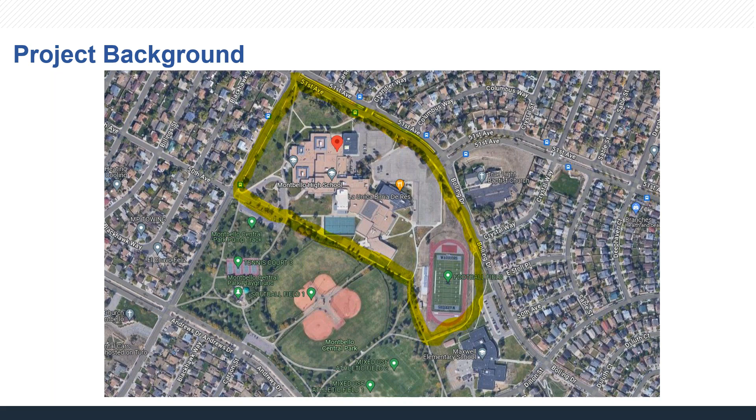So how did we arrive at using structural precast concrete? On the right is an image of what our schematic design process resulted in. To give you a sense, since it's been almost 4 years working on this project, the design team made up of Eidos and EUA was hired in spring of 2021. The general contractor was brought on board as a CMGC shortly thereafter in summer 2021.

Since summer is not the ideal time for public input and community engagement for schools, because people are on vacation and school is out, we spent that summer really digging into this process, assessing the building. Both DPS and the community came into this process saying maybe we're going to build a whole new building, maybe we're going to do a heavy renovation of the existing building. Let's go through this process and find out what we want to do. And of course, where we landed was somewhere in between.

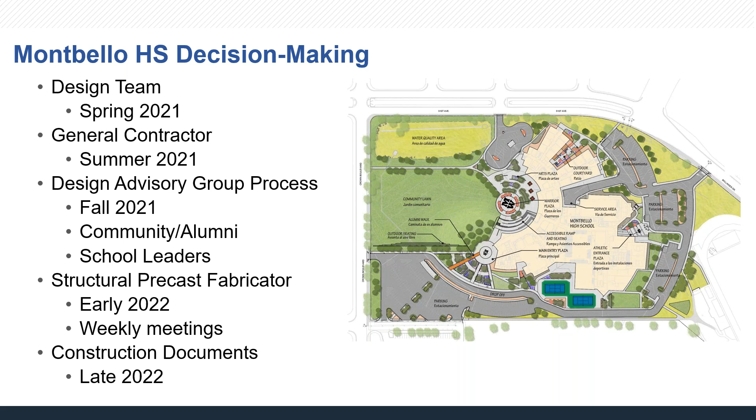We had that community engagement process in fall of 2021, with very active participants, particularly from the alumni group. Shortly after this, once we determined how much of the building was going to be constructed new versus retained, the structural precast fabricator was brought on board in early 2022. We met with them weekly, as Andrea will talk to you more about. Our deadline for construction documents was late 2022, and happy to report the building has just received its TCO, and students will be moving in August.

This is an image of one of those first bubble diagrams we came up with for solving the problem of how to build a new building on an existing site while making sure all students could still attend school on that same site for the 2 years during construction, and also how to incorporate the elements of the building that wanted to be retained.

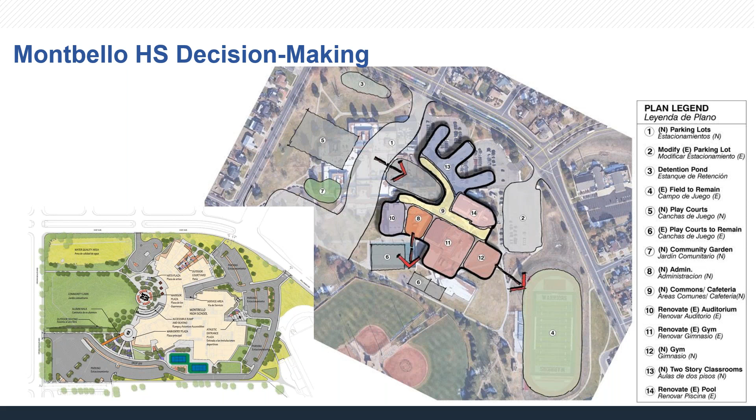Here you see an image of our schematic design compared to the initial bubble diagram. What I want to talk about is answering the question of where were the students during construction, and what did we need to keep to incorporate into the new building. The elements shown at the top of the screen in light green and yellow are where we literally cut the building almost in half, and for 2 years students went to school in that much reduced size high school.

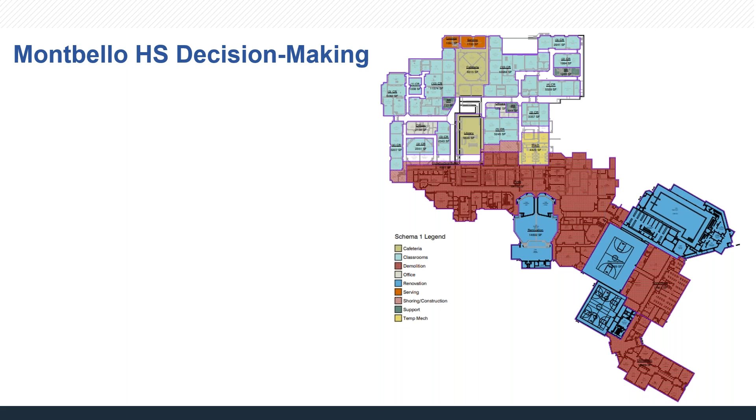It required a lot of renovation, temporary utilities, and a lot of structural work — that's the first time I ever had to cut a building in half. The elements shown in blue at the bottom of the screen are the auditorium, the gymnasium, and the pool — those are the elements the community wanted to keep from the previous building. Everything shown in red is what was to be demolished in this first phase.

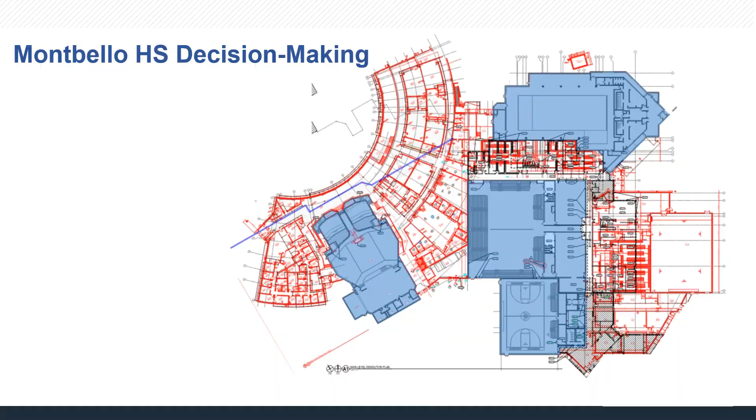This is an image looking again at the blue building elements shown — auditorium, pool, and gymnasiums — those were kept. This is zooming in on the portion of the new construction shown in red, or its footprint, and how we had to stitch those building elements together to incorporate into the new construction, as well as developing some new classroom wings.

So what led us to precast? Based on the puzzle we had to solve of keeping students on site, having a tight site to start with, but also wanting to honor this community with a building that looked new, honoring the black and silver school colors they're very proud of, we started looking at precast. A lot of times folks make the decision based on speed or money, and those were elements of our decision.

Andrea is going to get into the details of how this saved us some time and a little bit of money, but it really was also the permanence, the beauty, and the big design idea for this project: this idea of a cultural quilt, since there are so many different cultures and elements of the Montbello community and opinions about this project. We kept using this idea of stitching all these different pieces and parts together to create a more beautiful whole, and we felt the precast allowed us to do that.

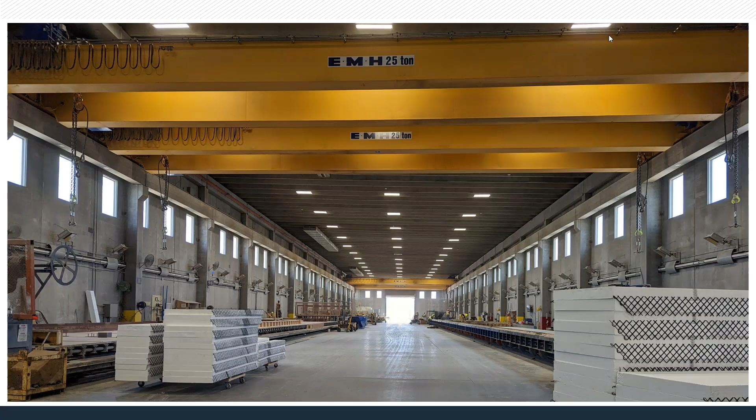So with that, I'm going to hand it over to Andrea to get into more of the construction details. Hello everybody, I'm Andrea Nickel, and the key to this precast, at least the successful portion of it, is to coordinate early and often. We recommend at least by design development.

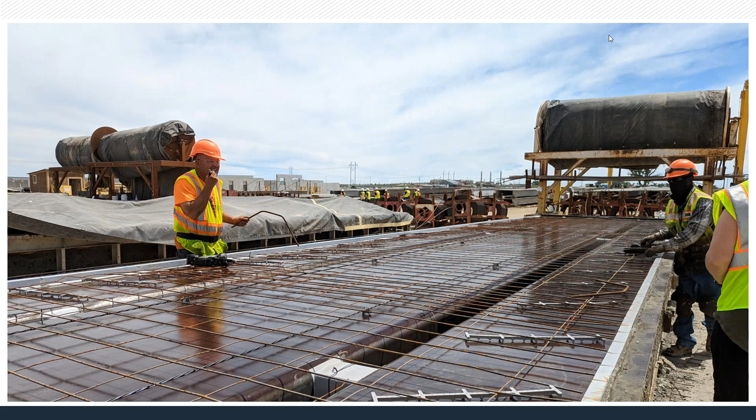We started with a tour of the facility, which was great since it's close by. We needed to understand all the parts and pieces, how it was put together, how it was made, so we could inform the design impact of this. With the tour we found out the finish face of the pattern is face down, and the inside face that's inside the building is the troweled one on top. As for the inside of the panel, we needed to know what's going on inside because we've got all kinds of things too.

We've got the welded wire shown here. On the next slide you'll start to see some of the conduits, the embed plates, the steel hooks, the pick points. Jane, if you want to flip to the next slide... there we go, some of the others.

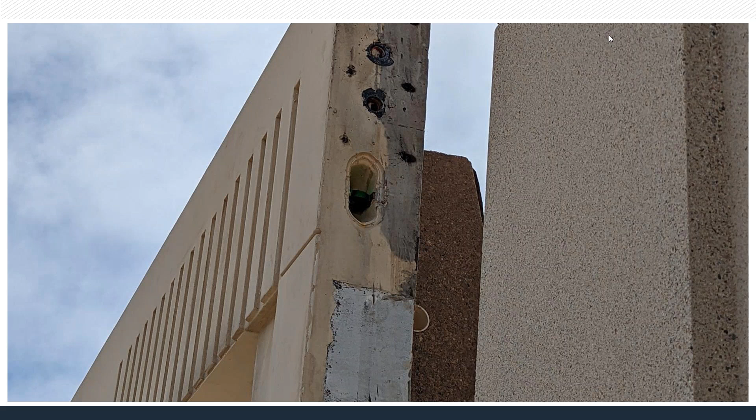Moving to the next slide, with coordination obviously comes the BIM model. We were able to share the BIM model with the general contractor, and the fabricator also had access to it, so they were seeing it the whole time we were drawing in it. Again, start as early as DDs at least. This is a whole floor plan; the yellow walls are the precast walls, and the blue is the portion Jane talked about before, the existing building portions.

With this BIM model, we started weekly meetings at the beginning of CDs, and they went on for about five months. We were meeting with everybody, pulling in the engineers—electrical, structural, mechanical, plumbing—and every week pulling together all the parts and pieces of who's going through the wall, in the wall, etc.

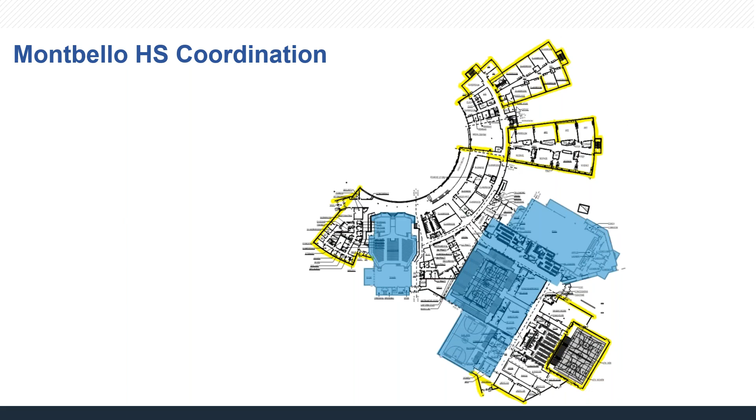The next slide shows construction. Jane talked about how we had a limited site, so we couldn't do tilt-up and went to precast instead. Everybody knows school projects are always fast and furious, so we phased the project and did a foundation package first, shown here shaded in gray.

By getting that poured in place early, the precast panels came in and they just set the panels in place, and we've got our building. You can do precast all the way down to the footer, but this way the foundation was ready to go—if you pull them to the footer, they're part of the foundation package. This process helped us schedule-wise.

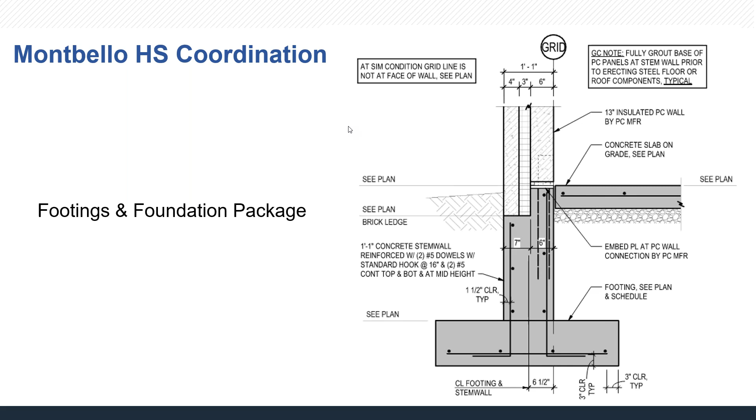Next, you need to understand the limitations of the plant. We knew the truck beds and pouring beds could do 12 feet wide, and our building at the tall points was 48 feet tall, so we knew our panels were going to be 12 by 48. The red lines show where we divided them up, and from there we could start to understand the parts and pieces.

Jane talked about the patterns. The purpley blue color demonstrates where we put the linear pattern—it's kind of drapey looking. The cyan color is the rough stone one, and the rest is acid etched. Sorry, I had it backwards: peach was the acid or sandblasted rough one, and the cyan is the windows.

Once we got all those parts and pieces located, we realized there were cost savings by moving these windows and patterns around. We didn't change their size, just relocated them on the bed when pouring the panel, trying to save money that way.

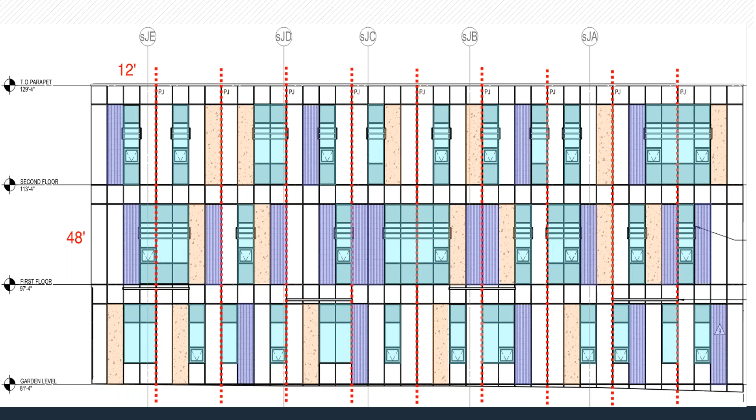The next one is the insert for the window—that's the part in the back of the image, and the window is being moved around. The images closer are the liners, so we could reuse those, and that's what's saving us money.

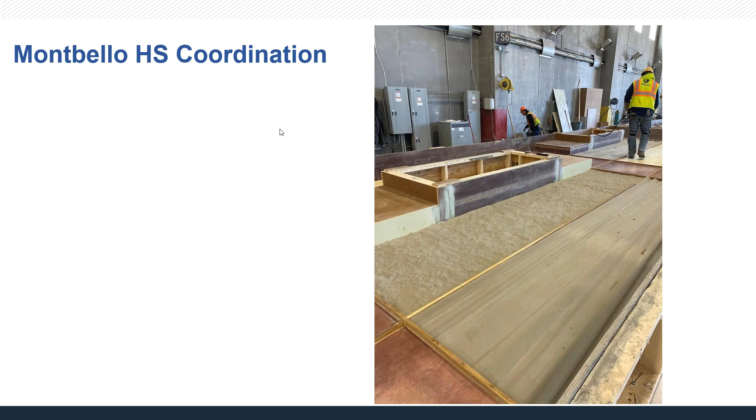The next slide gets kind of muddy, and this is what we talked about at our weekly meetings—pulling everyone in to discuss what all was going into and through the building. We had embeds for steel, windows, fire alarm, cameras, lighting, lots of power and data, WAPs, you name it. Roof drains were all of a sudden puncturing the building, and everybody was drawing on top of these things before submittals even happened.

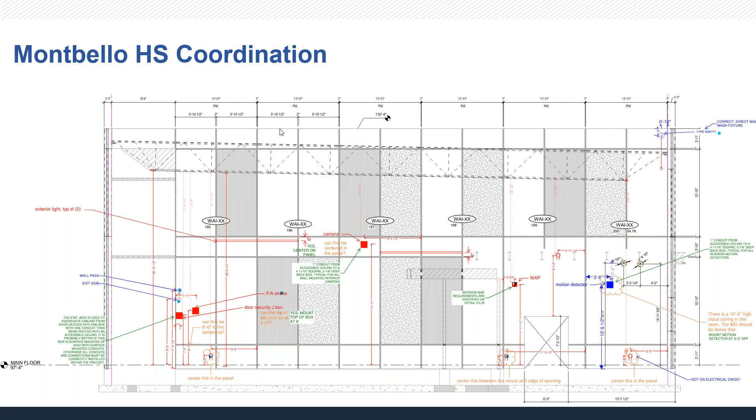The next slide gets into construction. We started November 2022 with the panels being poured, already working on foundations out on site with our first phase.

The next slide shows what Jane was talking about before—a limited site, with red areas showing active construction. Keep in mind, with the neighborhood around us, we had 205 semi-truck deliveries bringing in 246 pieces of precast, and a crane that had to move around the site 11 times. Everybody sees cranes, but this thing weighed a million pounds, so it was an effort each time to strategically locate these panels and not fly over any portion of the existing building where the kids were.

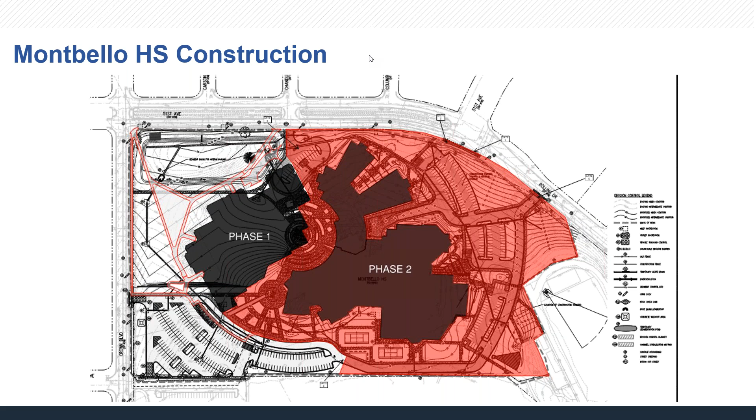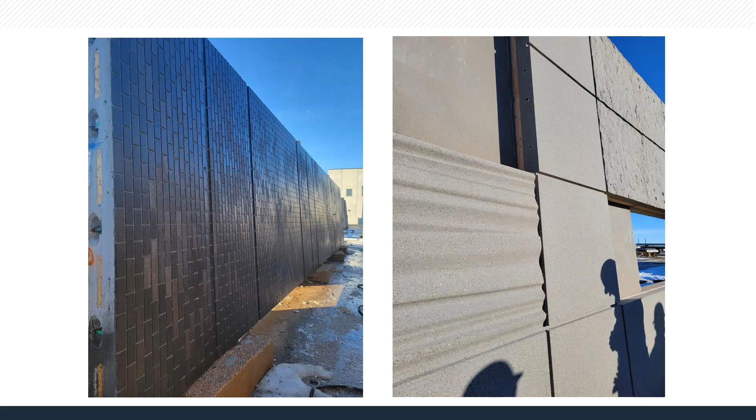So they started pouring these panels, and we could go up to the site and review them. You can see on the drapey linear pattern, shown horizontal, there are some holes—we'll talk about those in a bit regarding our sunshades. We could get a close-up look and do our own quality control; of course Wells had their control too, but we could go in and see how we felt about the color coming out, etc.

The brick on the left-hand side is thin brick. Usually architects don't like the idea of thin brick because it comes in little pieces like this, but we were able to match the actual full-size brick, so when you're looking at this you couldn't tell if it was actually thin brick or full brick. The mortar color could change afterward too, but the mortar was set on site, which was great. Deliveries started coming in February of 2023.

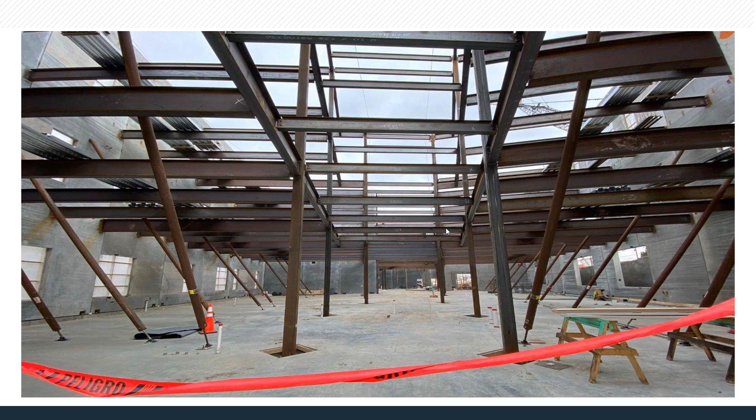Sometimes precast is a lot faster, especially when it comes to the gym pieces.

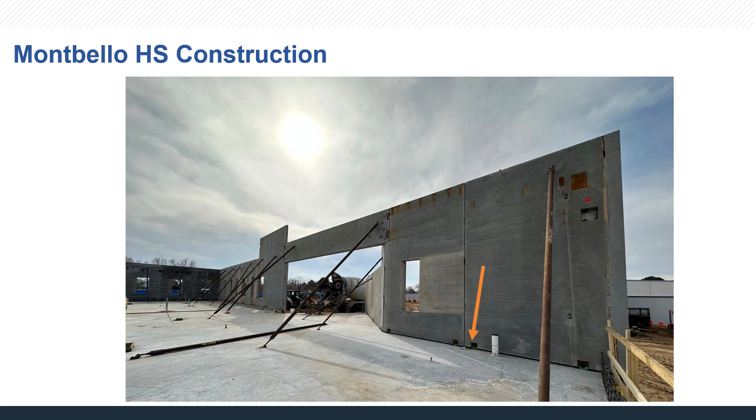The next slide, we talked about the foundations package being an early package, so the floors were poured and then the stem walls. Then these panels came in and were set. We've got these little pockets, the arrows pointing to them right now - these are the weld pockets. If you go to the next slide you'll see a close-up of them.

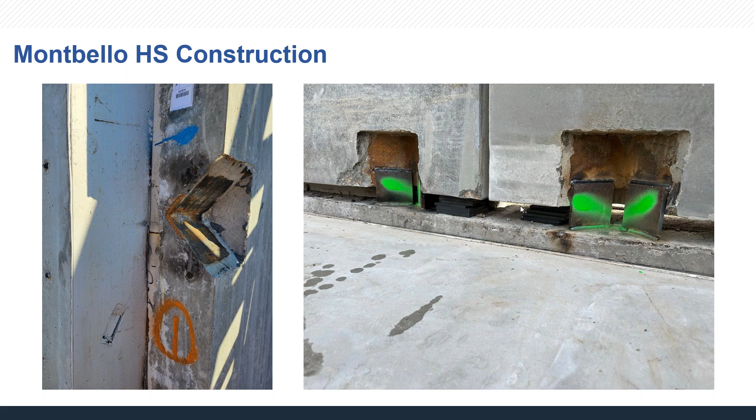The one on the left is looking at the end of the panel before they set it on the ground. The one on the right is the weld pocket. The foundation wall sticks up with these little embeds, and the steel slots into place with the precast. These embed pockets, weld pockets, get fully grouted out and painted over, but you'll see this in the finished product unless you're framing over the wall, so something to keep in mind.

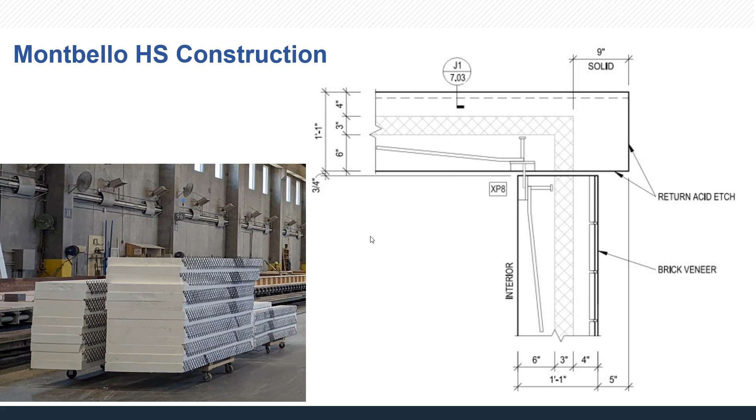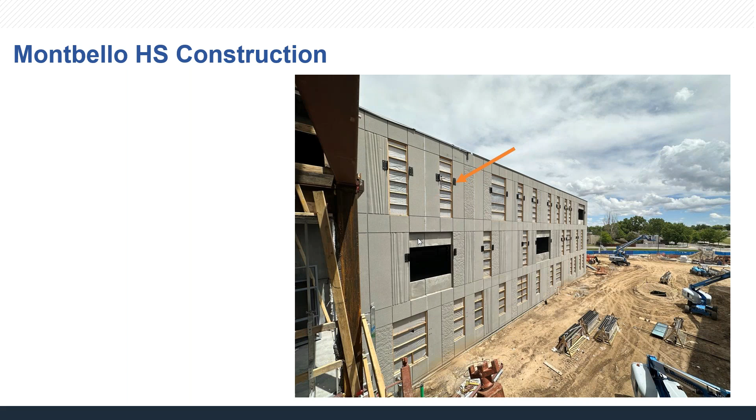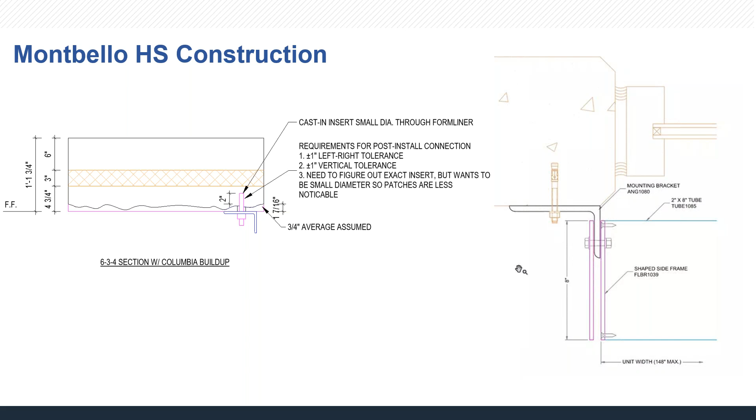So if you go to the next slide, you can see the detail here, and then click it in again and the little loop's gonna show up. There it is. So you're seeing a detail of the precast concrete with a steel angle in it, and this little piece that popped up at the bottom is called a straight loop ferrule insert that was cast into it.

It didn't go through the insulation because we couldn't ruin our continuous insulation - we had to make sure we were thermal, and we didn't want to compromise the integrity of the panel thermally or structurally. So by utilizing this little insert, we could bolt our steel angle attachment onto it for the sunshade louver.

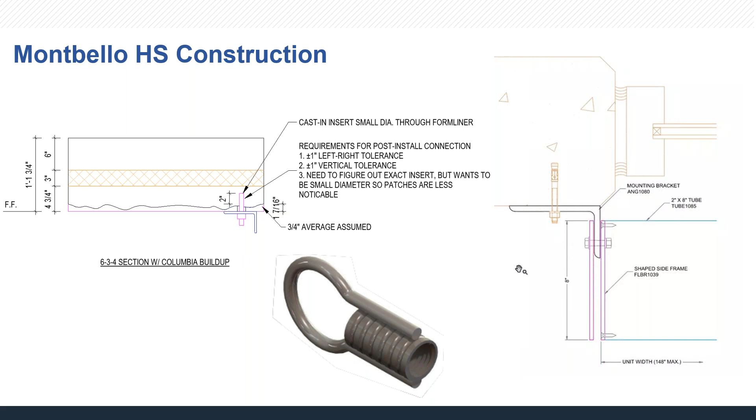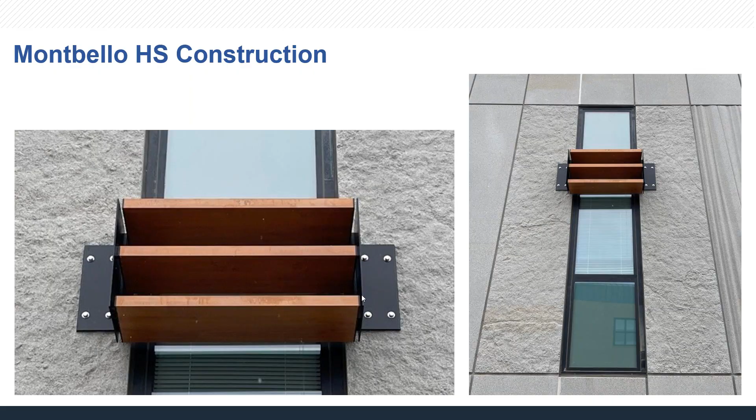So the next slide, we talked about those holes - well unfortunately, before we could get to it and it was poured, we had a whole row of these sun louvers on the very bottom elevation which we removed after it was poured. But the great thing with precast was they patched all these holes in place while the panel was up, and you can't even tell. If we even zoomed in on site to the bottom of this elevation, it's undistinguishable, which was great.

So now let's look inside.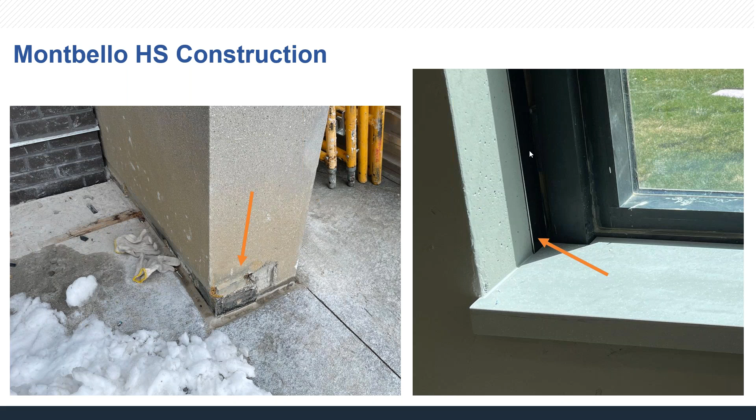Moving into the building a little more, we're inside one of the classroom spaces. On the far left are two precast walls, because this is the end classroom with some windows, and they painted the walls - we had quite a few rough spots. They can come back in, smooth them out, and paint over these. The right image is the finished product, but I have arrows here because I want you to be aware there are some really big caulk joints - easily an inch thick throughout.

We put all of our technology over on the left-hand wall here. Of course, you can fur these out, the precast walls, but to save money we left these exposed. Just keep in mind what you're going to get.

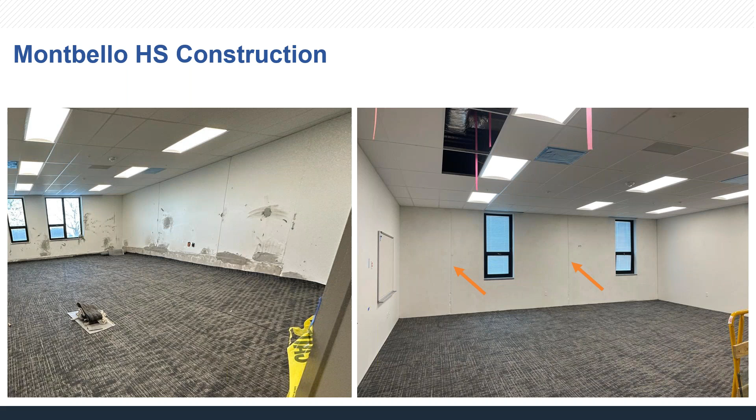The next slide is a video of them setting the panels, timed from February 2021 to April 2021 - just a couple months - showing how fast these go up.

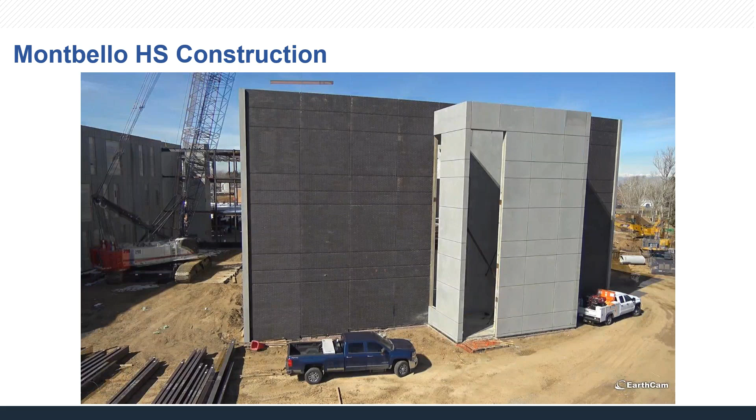We'll see. It's a little jerky. And that is the end of our Montbello High School presentation.

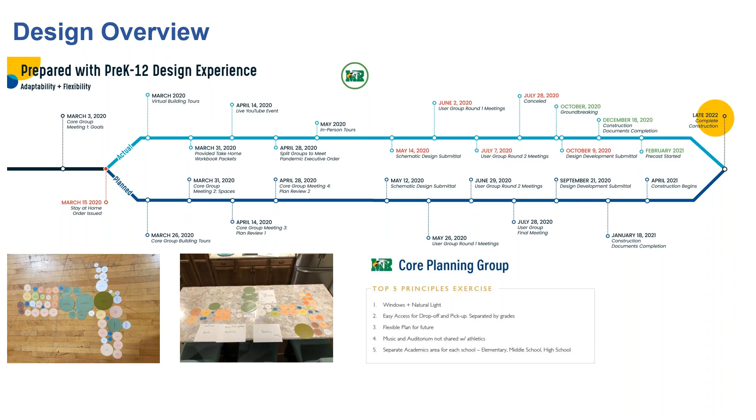A little bit into the design process. This is just some iterations of how we worked through the floor plan. I wanted to touch on how we tried to economize and work with specific precast elements in planning out the sizes of all the spaces, knowing that not only were the walls a precast sandwich panel, but we were also using hollow core and double T's, so we had to coordinate everything with the span of those elements for the floor and roof as well.

Jake will touch on that a lot more in depth here. But that really was a driver on certain spaces we knew we were repeating over and over again, like classrooms. So we've sized classrooms to actually work with a common hollow core width, so that we weren't cutting things down on site. We could use more standard widths and depths as needed, and really have an efficient floor plan from the get-go that worked with that.

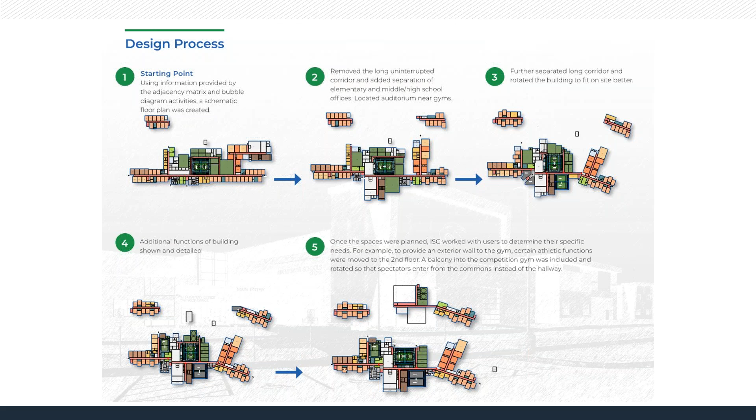This is just a quick shot of what we ended up with for a site plan rendering. We had about 60 acres to work with, which was about 30 acres too small, I would say, of what's recommended. There's also an existing farm site that didn't really want to sell on this site, and that cut into the site at the top left there where we have all the text over it.

The other driver was that we had to balance using the site effectively, getting all of these elements on the site. It seemed like every day they were asking us to put more on the site, so there was a lot of stress on that.

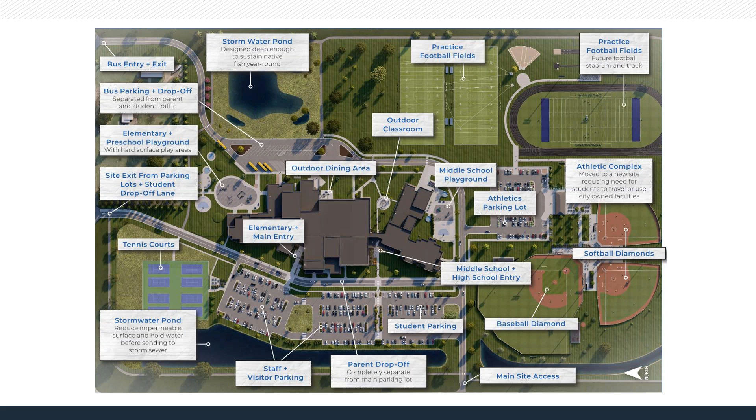But also, how do we efficiently use precast, but get lighting and natural views to every single room? One of the things I'm really proud of is there are only 2 classrooms within this 200,000 square foot facility that don't have exterior windows or views. I think we were able to really use the precast well in an economical way, but also give every classroom what it needed in terms of natural light and views.

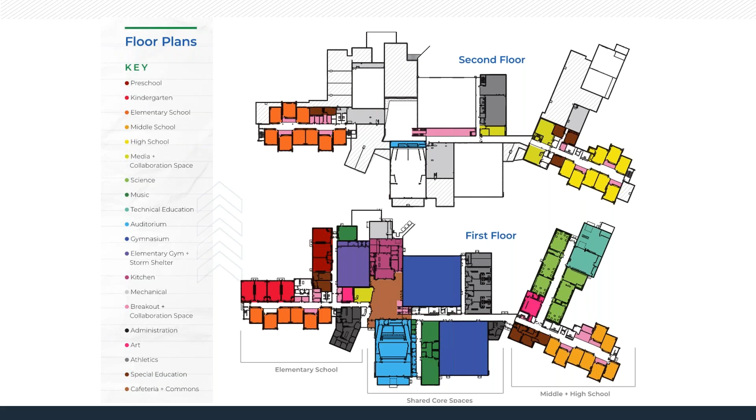Precast being inherently almost non-combustible allowed us to use a certain code type, Type 1B, which is unlimited in terms of allowable area until you need a fire separation. So there are actually no fire separations in this building other than the storm shelter, which is on the first floor in purple. We'll talk more about that. Otherwise, there was no need for any fire separations, and as we know in design, those things can be nasty to deal with. Firewalls are very complicated, so that really helped us design this a lot quicker. We were able to open up the commons, the gym, all of these breakout spaces, the media centers. There are so many places within this building that are open between floors or other spaces that I think really give it a very unique and cool design overall.

Utilizing the total precast building with exterior precast panels, interior precast column and beam lines, precast spandrels, hollow core plank floors, and our double T roofs provided a multitude of benefits. The only steel we have on the project is the roof deck and roof joists for the auditorium and the varsity and middle school gyms. With this being a Type 1B construction, those structures were actually high enough that no fireproofing was needed on those structures either.

Working with a complete precast structure made utilizing our elementary gym for the 1,100 occupant storm shelter easier and more streamlined. Allowing the precaster to set all the structure and continue on without a break in the schedule was a huge benefit. Within this project, different areas were also designed for future expansion on the second floor. Because we're utilizing hollow core plank for our standard floor system, we're able to use that as a roof system and keep all the structural requirements for future expansion to change to a classroom. These additions are actually in the works now, as enrollment has been growing rapidly.

Overall, the biggest benefit in total precast we saw was in the planning stages and schedule. For a building of this size, almost 200,000 square feet, going with total precast allowed us to greatly shorten the overall timeline of the project. From the first precast wall panel set to the last double T roof member was only about 60 working days, and at this point the building was almost fully enclosed, allowing all of the trades to hit the ground running, not waiting on other components like we have with different building types.

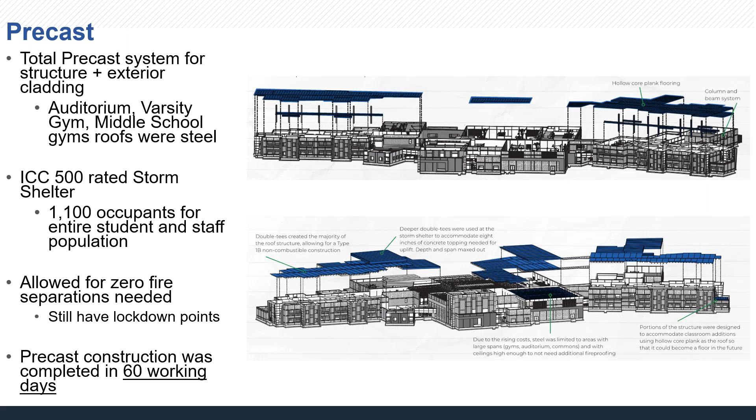Coordination between ISG and Wells played a pivotal role in the project being successful. We were also able to bring Wells on early through an early bid package to help with building efficiencies, timeline requirements, and any concerns that they see. This early contract allowed us to proceed with finishing our architectural, mechanical, and electrical drawings while Wells built their model. Isometrics of the Wells' model are shown on the side here, which were used to help produce the shop drawings.

With weekly model updates and bi-weekly meetings between ISG and Wells, we were able to streamline our shop drawing process and also greatly reduce our issues in field with openings such as windows, doors, wall changes, or all mechanical openings throughout the building. Being able to keep up in real time as opposed to waiting for the CD drawings was vital in us getting precast out on site.

Lastly, a large obstacle for Maple River Schools was that this was the first constructed ICC 500 storm shelter in a school after the state of Minnesota adopted the IBC 2018, which now requires storm shelters for all educational buildings that add more than 50 occupants due to the wind loadings in our area. It was a learning curve not only for ISG and Wells, but also for the state of Minnesota. ISG, Wells, and the state met multiple times to ensure that the design and interpretation of the ICC 500 was clear. The inclusion of precast allowed us all to meet the stringent requirements while also keeping the cost down.

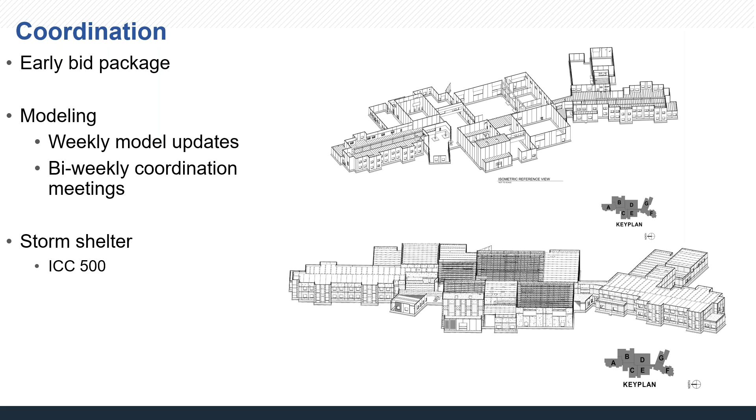And now, multiple school constructions later, the state still recommends precast for storm shelter design due to the efficiency compared to the alternative options. This coordination throughout the project helped make this facility efficient for Wells, which in turn helped the project come in millions of dollars under cost estimates.

So let's get into the finishes just a little bit. Since we knew we were working with precast, we also wanted to make sure budget-wise we were being cognizant of that. And so we really used metal panel to highlight the precast on this building, but we wanted the precast to stand on its own in terms of finishes.

We used a polished precast on the interior because we thought if you need something durable inside, like your cafeteria, why not just let the precast do that? We had to play scientist and show the school that the precast would hold up to their cleaning chemicals, which I don't think Wells had any concerns about, but we still left a panel sample in a bucket of cleaning chemical for about a month, and that was enough to show them it would hold up if it could sit in it that long. That was kind of a fun part of the process.

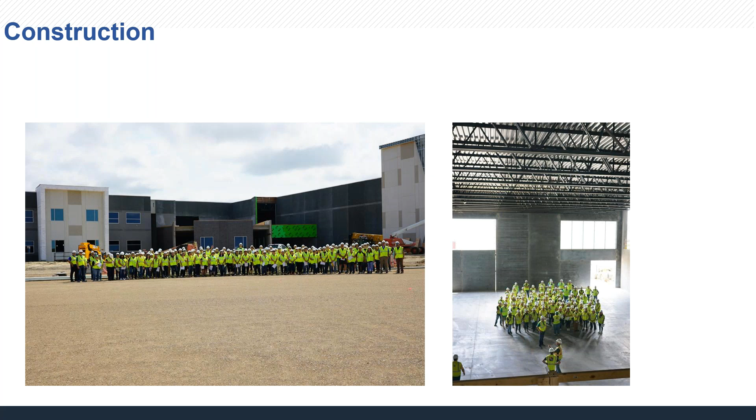Throughout design, the district and the staff were very interested in learning about it. So we actually did a staff day. I know one of the Wells employees lives right by the site and would tell us he's keeping an eye on it, and would talk to us about how cool it was getting to watch all that go up. So we took about 100 staff on site as well and walked them through the building when it was under construction, and they were pretty excited about that.

We also went out and toured Wells's plant while Maple River was under production, got to see them polishing some of the panels, which gave us a better understanding too for future projects of how can we design these finishes on these panels to work well, not only in the plant fabrication, but also look really good.

Where is that balance? I think throughout this entire project, we wanted to make sure we worked with precast, but we also kind of forced precast to work with us in certain ways. So there were a lot of areas where I think we pushed some limits of spandrel panels, opening sizes, those sorts of things to get what we wanted in a design, and then also made sure to meet in the middle and work with what's most efficient for precast as well.

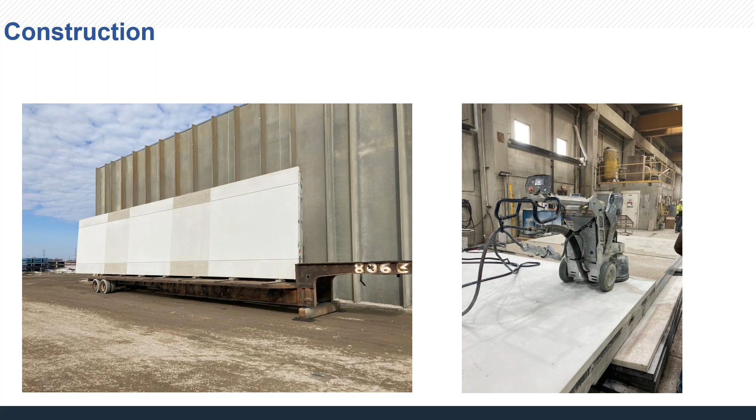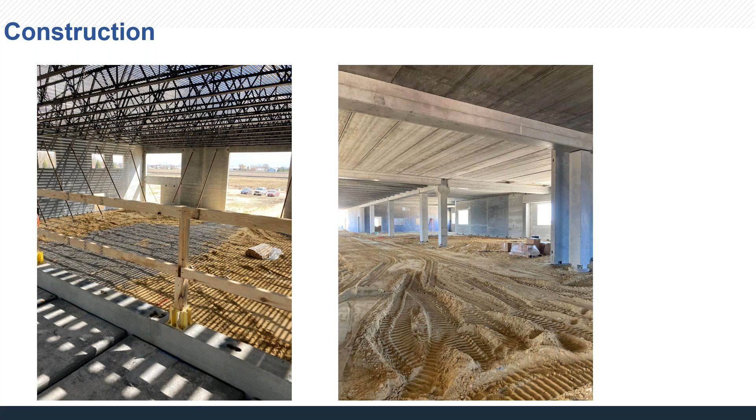Just a couple more photos here. I think these pictures really showcase the opportunities that precast allowed us during construction. The picture on the left, we were able to leave out 2 of the precast panels in the main gym that allowed truck access into the building and storage and accessibility for all the other trades. The second picture on the right highlights the openness of our first floor. Utilizing the precast column and beam lines, along with hollow core plank, kept our floor framing depth down. The total system is about 16 inches, including the topping, which in turn kept our floor to floor heights down. This picture is also taken less than 60 days after we went vertical with construction, and the building is completely enclosed.